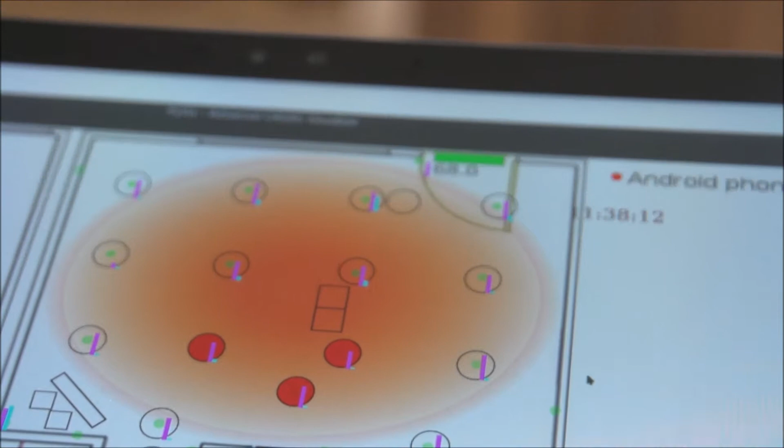Oh, do you have it up and running? Yeah, so when he opens the door, what you'll see is this green bar right here is the door opening, and then when he closes it, it'll go away. And in our data set that has now been logged, it's already back at our main server—the opening and closing of the door.

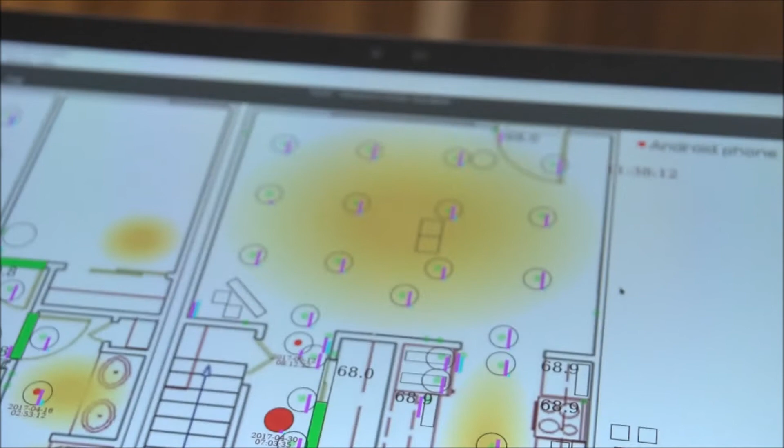All the red dots are motion detectors turning on and off. The big yellow fields are the lights being on. The numbers are a combination of temperature values—for example, it's 68 degrees here at the back door. Additionally, the sensors report how bright it is; the motion detectors have light sensors. It's not an incredibly accurate solution, mostly because we're occluding the view and they're not using an actual lux sensor—they're using a photovoltaic resistor. But you can tell when lights turn on and off, and you can see the sun coming up.

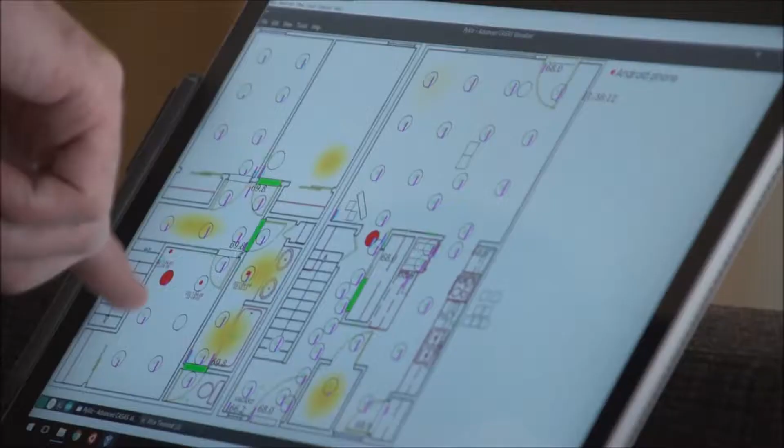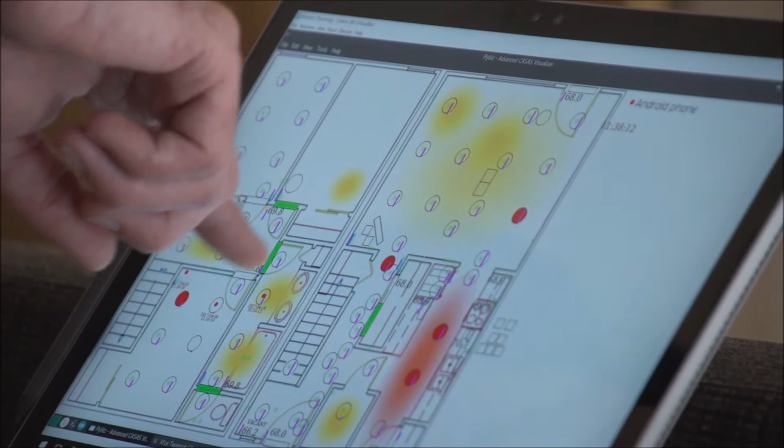When you're sitting down looking at this view, you can in no time tell what people are doing, because you'll know there's a bed here, this is the kitchen, this is the living room, and this is the bathroom. So you'll see them get up and go in here, and then they'll come out after a little while, and go into their bedroom, and hang out here, and it'll kind of vanish for a bit, then hang out here a little, and go back to the bedroom, then come down the stairs and go into the kitchen, and you're going, okay, looking at the time, that's about 8 a.m.

Oh look, they got up, they went to the restroom, they went back to the room, and then went to the shower. They showered, then went downstairs. You can see the temperature over the shower will go up as they use it, and then they'll come back into the room and get dressed, go downstairs, and be in the kitchen for a little while, then come out to the table. And you're going, okay, you can tell what they're doing.

So it was an act of translating between how humans perceive and model that data in their heads to determine what's going on, to get a computer to do the same thing. Once you've done it for a while, annotating a home, actually typing 'now they're cooking, now they're cleaning,' what happens is you stop using this tool and you just read the sensor data raw, because you eventually end up with a map of all the sensors in your head.

You just start scrolling down the data. You'll be able to process tens of thousands of data points in a minute. You're just like, and we know we can get a computer to do the same thing.

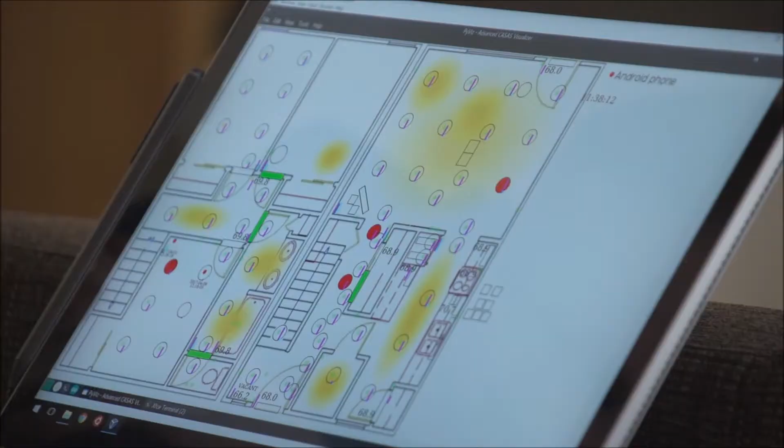We have a lot of temperature data about this house. It's probably cheap. Well, yeah, temperature sensors cost nothing to add, so they just throw them in. They also, all the battery-powered ones, report the battery levels, which is why Brian knows which ones to change.

That's the purple bar here, to say which one has anything at all. And you notice this one's got really low and isn't changing. That means it turned on and died. So that sensor, he's going to go up and change it, and he'll put a new battery, and after a moment it'll start ticking over and the bar will go back up.

Yeah, so this is it. So to say, did it say occupied? It says occupied. Yeah. So what we did is, just a second, it's still just the same door sensor that we use on the doors. They can have external connectors.

We actually unstitched the chair, so if you want to sit in there, we unstitched the chair and wired in the occupancy sensor. So when you sit, the pressure sensor says you're there. That allows us to get very accurate timing on the clinical tests that involve sitting and standing transitions.

Because it's all wireless, it can be anywhere in the house and it'll work just fine. The kitchen is looking lovely, but for example the doors in the kitchen are wired up, so we know when doors are opening and closing. There's actually inductive coil measurements inside the stove, so we could tell when burners were on. We've done work with that.

There's a temperature sensor specifically right above the burners of the stove, because one of the things we do in private homes, since wiring anything electrical is expensive, is we decided let's put a temperature sensor over the stove, and you know when it turns on because you can see it. You'll watch all the temperatures in the home kind of going along like this, and all of a sudden the stove will go, woo!

We did a similar thing with the refrigerators. We used to put door sensors on the sides of the refrigerator, because we wanted to know when people are getting in and out. It's a big part of eating and cooking and day-to-day life. The problem is refrigerators are actually designed to be slick, so our sensors would fall off.

We tried quite a range of sticking and magnets and everything else to try and get them to stay on. So instead, at some point, when we went to the wireless setup, there was one day in the lab where we were all sitting around trying to figure out what to do about these sensors on the doors, because I was having to drive to Seattle to fix sensors about every two months, and that's a lot of driving. So at some point I went, could we just put one inside? They're wireless, right? So we grabbed a motion detector in the lab and threw it in the refrigerator, started opening and closing the doors and moving it around, and it seemed to work just fine.